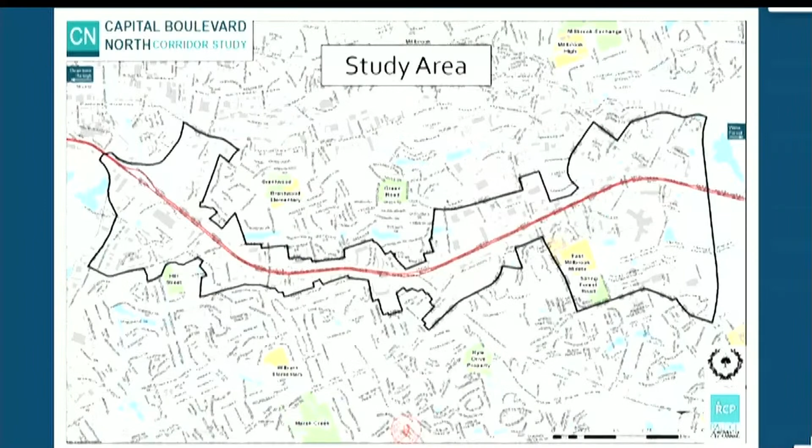Next slide, please. So the first part of the study is the street improvements, focusing mainly on Capital Boulevard, and that has two parts that are integrated in order for it to function.

The first part is a proposal for a series of interchanges on Capital Boulevard. Pretty much all the major signalized intersections are proposed to be converted into grade-separated interchanges. The point is to increase capacity for vehicular traffic, but that raises the question of how you accomplish that without causing a lot of negative impacts for the existing urban development that's there.

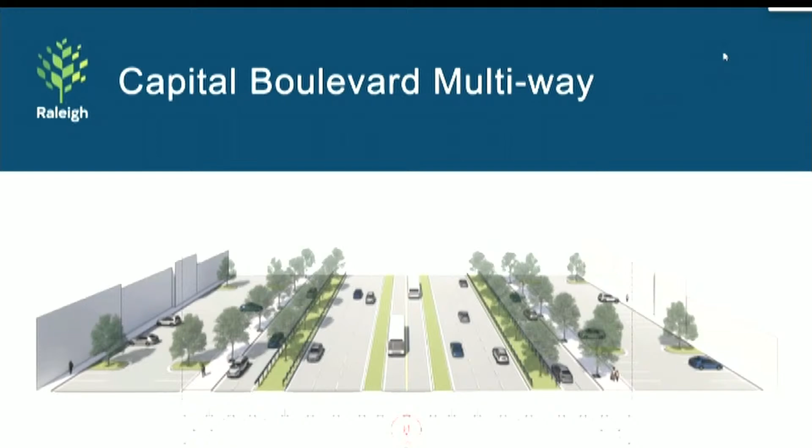The other thing I'll note is that on some streets, the current proposal for Capital Boulevard North is that there not be a full movement interchange, meaning you would not be able to make all the turning movements. In some places, we're recommending that it only be right in, right out, so you could only make right turns onto the side street from the local lane, or from the side street onto the local lane, and there wouldn't be a way for vehicles to cross Capital Boulevard at some of those smaller cross streets. In those locations, we're proposing a pedestrian bridge, and I'll talk about that in a moment.

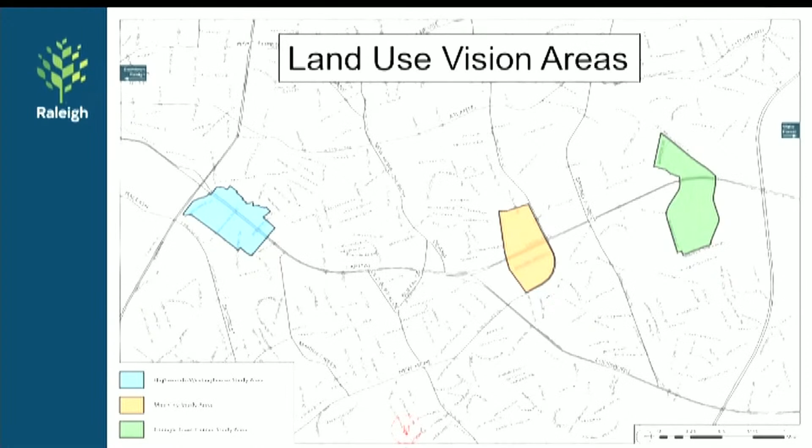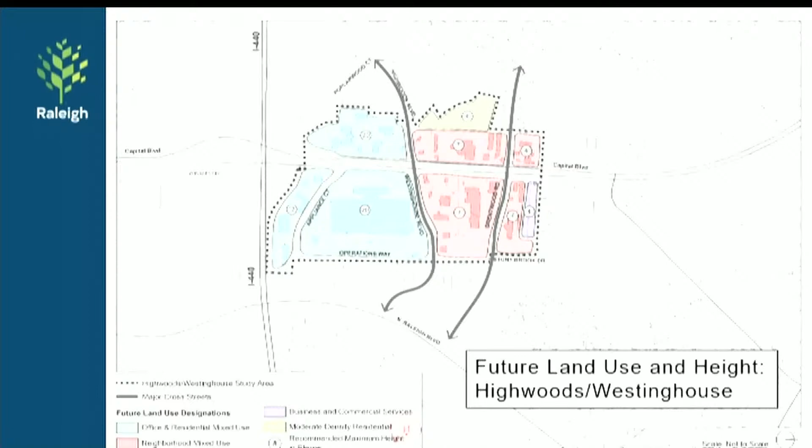The next slide shows what that can look like in the Highwoods area—recommended types of uses, whether residential, office, commercial, or a combination, and what heights would be appropriate. The next slide shows that we can integrate that with urban form policy recommendations, which say there should be secondary streets that create a more walkable urban area with integrated land uses that are not fronting directly on Capital Boulevard.

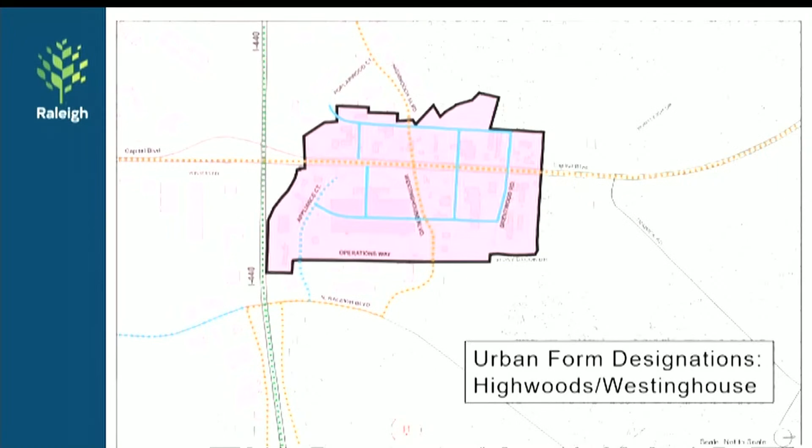Capital Boulevard is not the most pleasant place to walk today, so we think there can be new streets that provide a great walking environment that doesn't rely on Capital Boulevard. That's what the urban form policy can encourage. The next slide shows that if these policy maps are implemented through private redevelopment, we could see a recreation of those areas to look more like this.

So that's basically the initial phases of the Capital Boulevard North Corridor study—coming up with street improvement recommendations, then adding the layer of land use recommendations. This third layer we're going to talk about this evening is how those things get linked together for a full multimodal experience.

If you noticed on the multi-way boulevard section at the beginning, what was in the middle of Capital Boulevard was dedicated lanes for bus rapid transit. That's the first multimodal element—Capital Boulevard itself is proposed to have bus rapid transit, with a BRT station at each one of the proposed interchanges. That creates a great way to travel along Capital Boulevard without a private vehicle. Then there's a question of how we can supplement that with bicycle and pedestrian facilities, and the next slide will start talking about that.

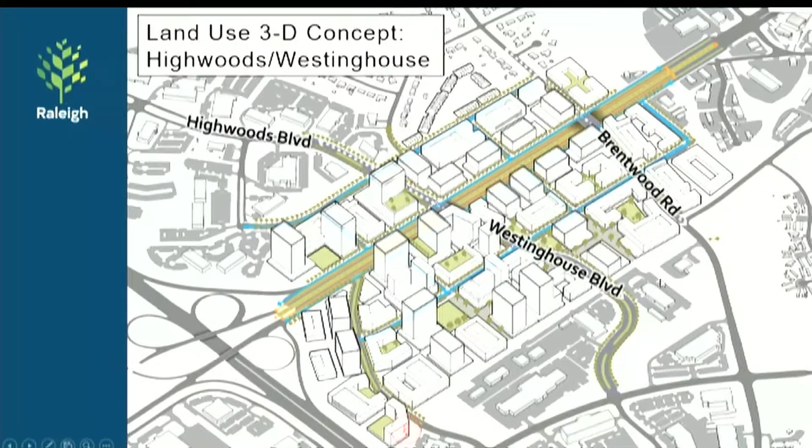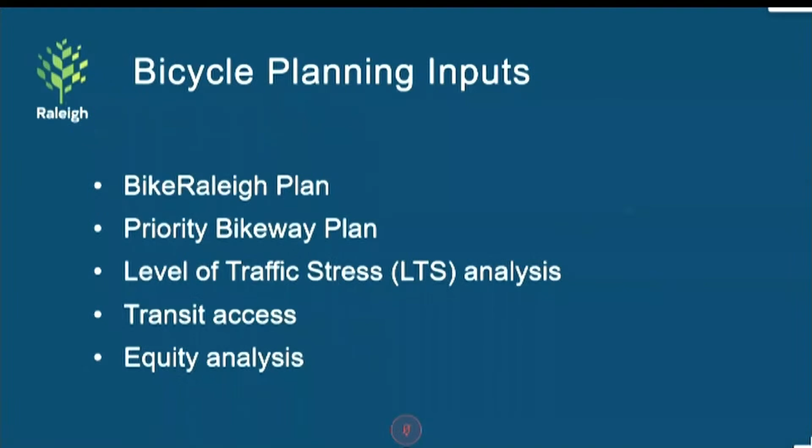When we started thinking about planning for bicycle and pedestrian improvements, we looked at the existing bike plan, and then the priority bikeway plan that emerges from that. We had our consultant Toole Design perform analysis, as well as our lead consultant WSP, on level of traffic stress, transit access, and equity based on demographic data from the corridor area. The next couple slides just show those maps, which are also included in the map set with the agenda, so you can look at those in more detail. I won't spend a ton of time, but these are the inputs that went into this planning.

Regarding traffic stress, Capital Boulevard itself is not the most pleasant in its current form. But there are a number of neighborhood streets on either side that are more comfortable for walking and cycling, and some of the cross streets have differing levels of comfort as well.

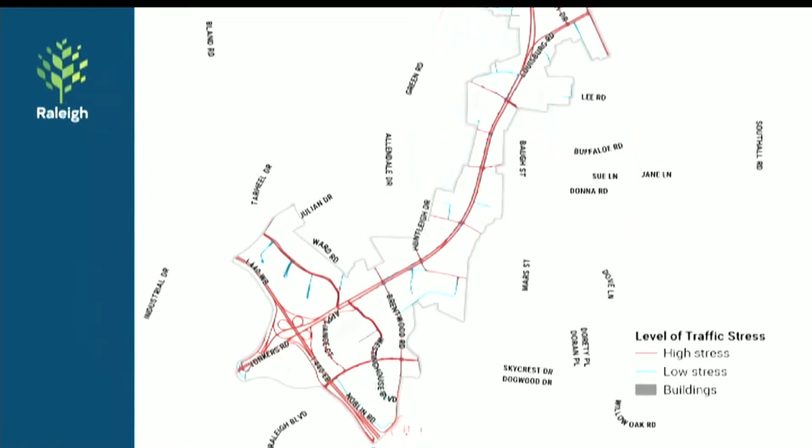For access to transit, Capital Boulevard currently has the Route 1 bus service, which is the highest ridership transit route currently in Raleigh. There are a number of crosstown connectors that also access Route 1 and provide transit service to the east and west, and also north towards the Wake Technical Community College North Wake campus. It's a well-served area for transit currently, and that would only improve with bus rapid transit. So we want to make sure any bicycle and pedestrian improvements link those things together.

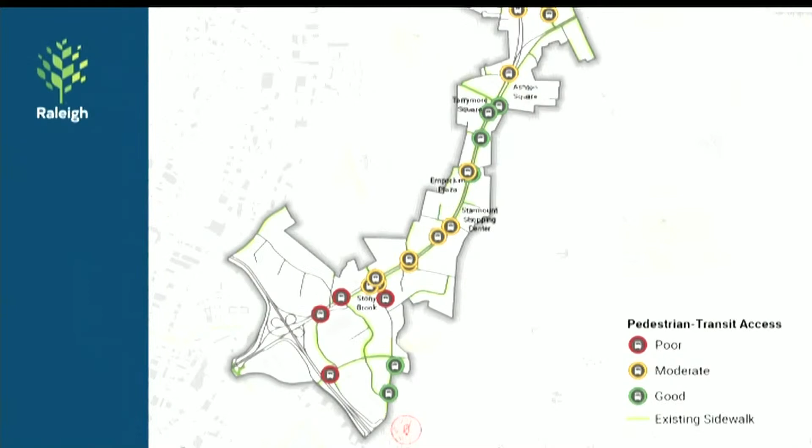When we put those things together, we did an initial technical analysis to give us a basic framework of where we think are the most desired places for better bicycle and pedestrian facilities. This map is our first take based on the criteria we put together.

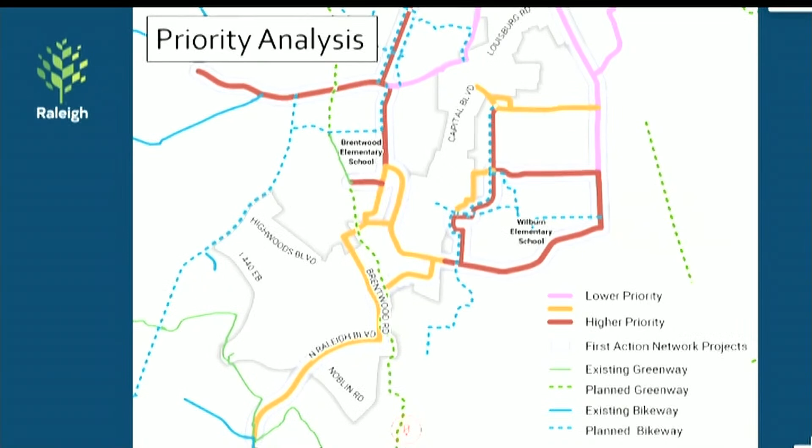From there, we took a deeper dive, looked at what's on the ground, and considered how these improvements would actually get implemented. The next slide talks about how we envision implementation, and as we walk through those steps we'll see the layers of each one, and at the end we can look at how it all comes together.

There are three ways we see bicycle and pedestrian improvements being implemented on or around Capital Boulevard. The first is city street improvement projects—streetscaping and street construction projects that happen regularly, with a number currently in planning or construction around Capital Boulevard. That's a way we can implement some of these recommendations in the near term.

As I mentioned at the beginning, this corridor study proposes to rebuild Capital Boulevard itself and a number of its intersections with grade-separated interchanges. Those are opportunities to incorporate new bicycle and pedestrian infrastructure, which is especially important because of the BRT connection.

Finally, private redevelopment can lead to the construction of new public streets. A lot of that comes from the street plan map, as well as the Unified Development Ordinance standards and the street design manual. That's a third way we can look at accomplishing this.

The next slide talks about the timeframes we see for these approaches. As I said, there are a few projects already in planning or under construction that will bring new bicycle lanes and sidewalks in the near term. If we can use this study to encourage funding for other street improvement projects, those can supplement it. The Capital Boulevard corridor itself and the interchanges, if we're able to secure funding through the North Carolina Department of Transportation, could start construction about 10 years from now. Depending on how those projects break into different segments, it would take a number of years even after the first project is funded and goes into construction.

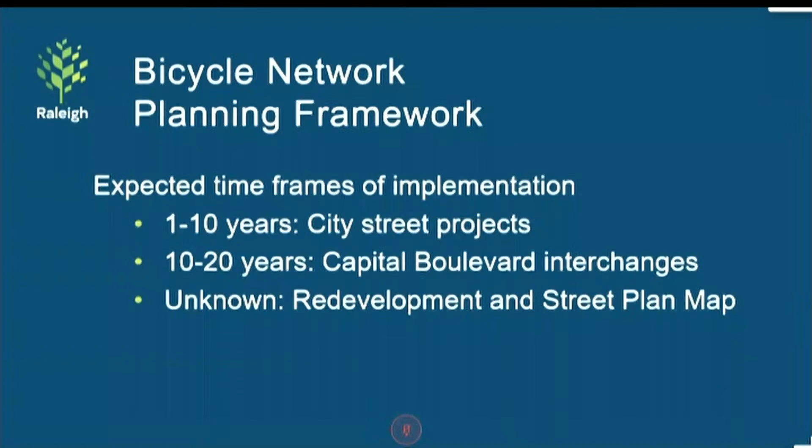So the first stage, as I mentioned, is looking at the normal streetscaping projects that the city does. Here's a list of those projects that are already either in design phases, programmed into existing budgets, or under construction. This is actually a pretty good amount of projects in this area. It's encouraging to know these will be in place in the next few years, providing at least 6-foot sidewalks on either side for all these streets, and for many of them a bicycle lane. That's a big help to the connections in this area.

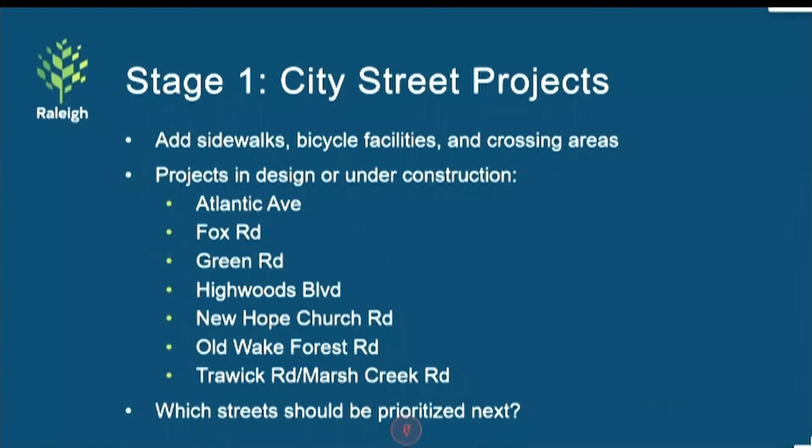So then we have to ask: knowing these are going into place, how do we create a true network that links these together and allows someone to really get around the corridor on a bicycle? The next slide will show how we prioritized different street projects when we looked at that question.

The map set in your agenda is basically the final version of this thinking. This was an earlier map we used to think through it. You can see we thought through this hierarchy of prioritization based on those existing projects.

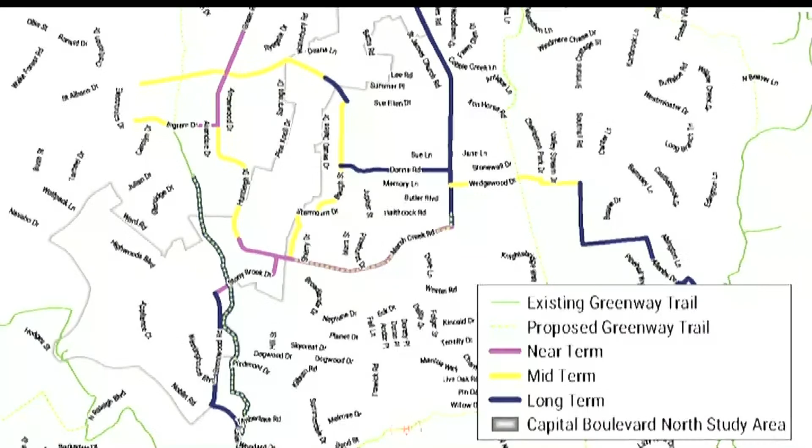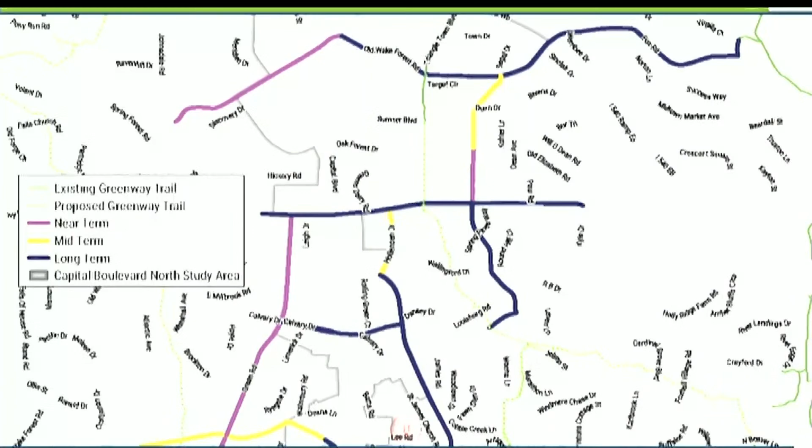The next slide shows the north end. These maps can be a little busy, and it can be difficult to see the vision, so the following slide has a map that I think is helpful. It's been helpful for me to think about this area because it's a bit more simplified.

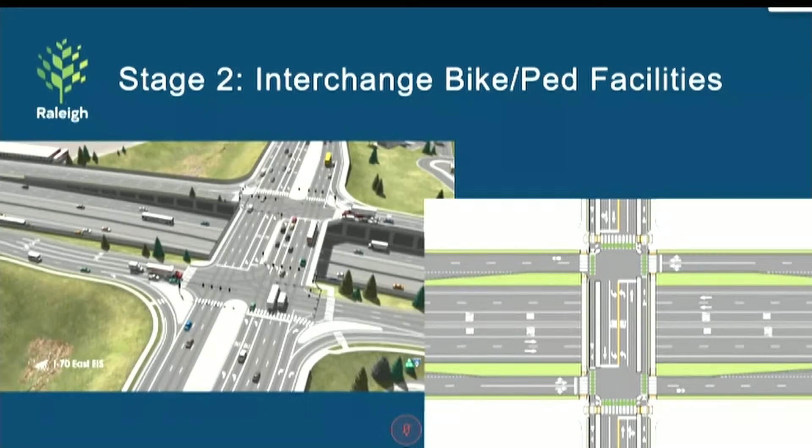The next slide covers stage 2, the actual rebuilding of Capital Boulevard and construction of interchanges. The city already has a policy on the books that when we have a grade-separated interchange, there should be a protected bicycle facility through that interchange, if a bicycle facility passes through it. We asked Toole, our consultants, to come up with drawings showing what that will look like.

You can see those are pretty regular — about every third of a mile there's a proposed interchange. That gives a lot of ability to cross Capital Boulevard without having to go too far north or south before reaching a safe crossing. The next slide shows some images of what those crossings will look like.

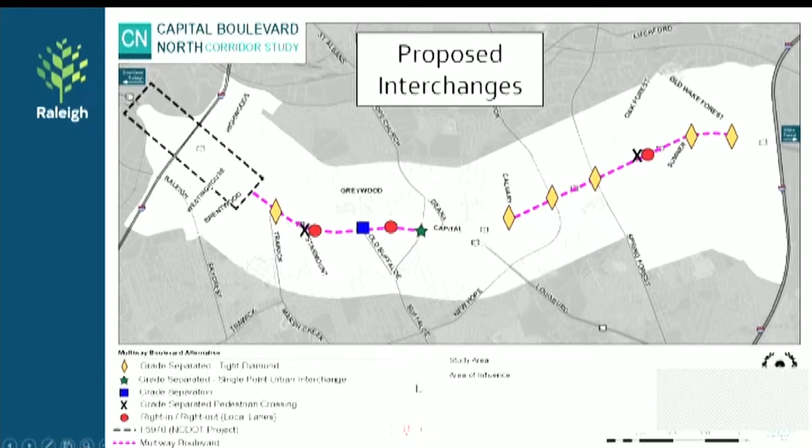These drawings are going to be included in the final study report that we bring to the City Council. The benefit of these is that, if and when NCDOT funds these projects and puts them into construction, this guidance tells them the types of facilities we would like included with these interchange projects.

You can see we have a couple different varieties depending on the size of the cross street. In some cases it may be reasonable to combine sidewalks and bicycle lanes into one multi-use path on one side for a smaller cross street. For a larger cross street, it may be better to have sidewalks and a protected bicycle lane.

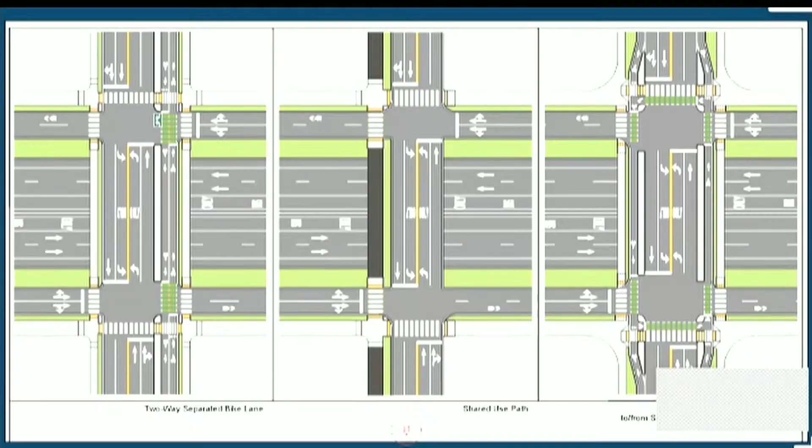I'm sure you're all familiar with what a protected bicycle lane looks like, but here are some example images.

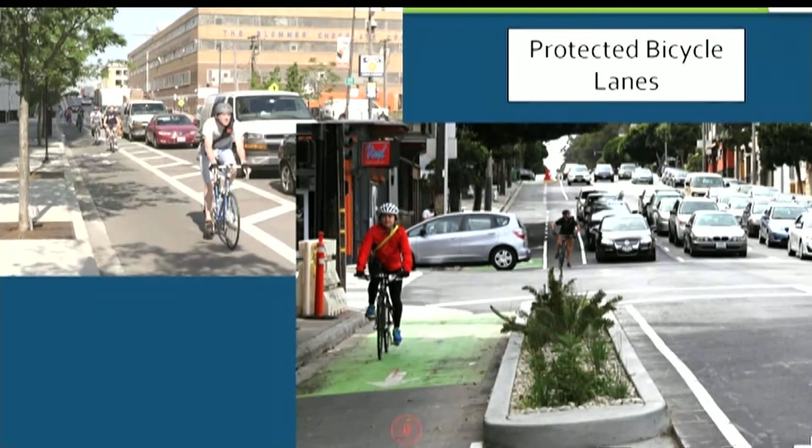And then the pedestrian crossing. We don't have design recommendations for pedestrian bridges, but these are the general type of bridges we would see, and of course they would have to be ADA accessible. If they are integrated with a bus rapid transit station, there would probably be more significant pedestrian access built in as part of the station design. I do want to say that the Capital Boulevard North Corridor study is not a BRT planning study, so we are not doing station design.

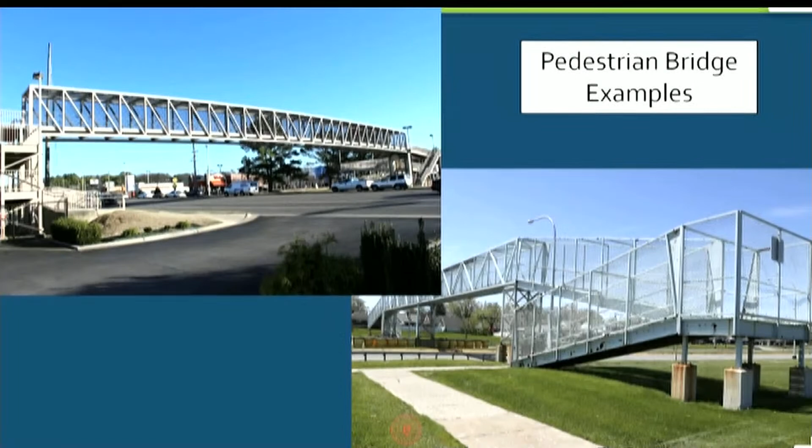We're not doing BRT route planning. We're simply saying that BRT makes sense for this corridor and that these interchanges make natural places for there to be stops.

The third stage we see for implementation of these improvements is that when private property redevelops, there can be a requirement that the developer construct a public street through their property. One way that can be required is through the street plan map. By adding streets to the street plan map and designating the type of street, we can encourage better bicycle facilities in certain locations.

In addition to the general street cross sections in the street design manual required by the street plan map, we are also working with the Urban Design Center to come up with custom street sections for some of these streets, particularly in the land use vision areas I mentioned earlier, to make them especially friendly to pedestrian and bicycle travel.

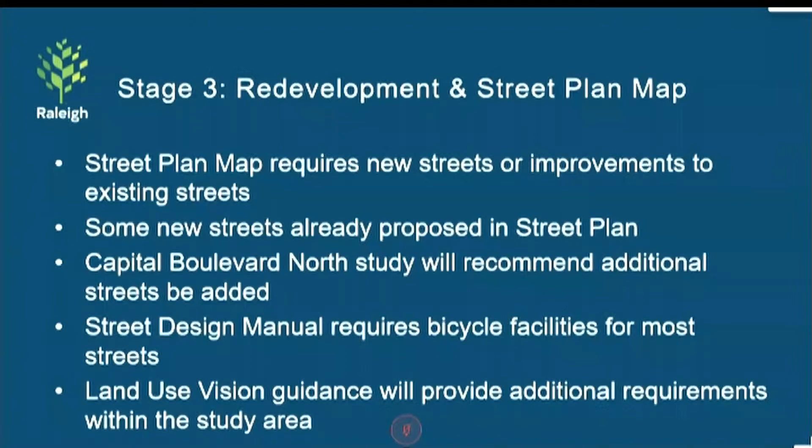Again, the time frame for that is unknown because it relies on private development. There are a couple of extra policies we are including in our recommendations that have to do with particular areas around the study area with somewhat unique contexts.

The Marsh Creek Greenway is proposed to come through this area. Marsh Creek passes underneath Capital Boulevard, north of Trawick Road, and currently there is not a way for that Greenway trail to be built with the current culvert. So one of our recommendations is that any street improvements from this study should include construction of a way for a Greenway trail to pass underneath Capital Boulevard.

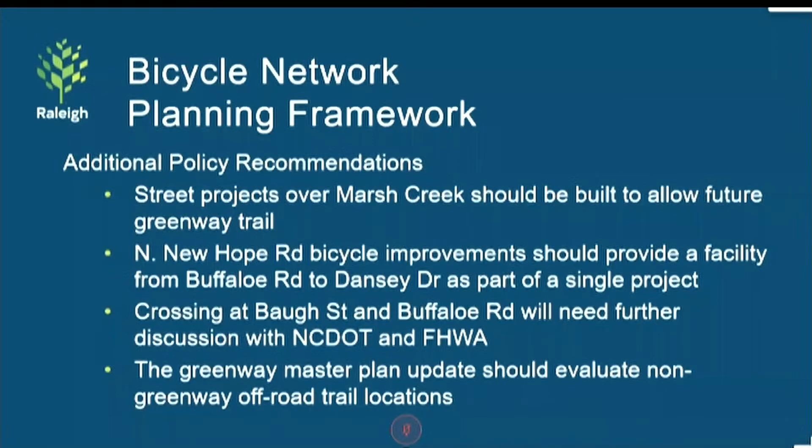For those users, there is a desire to make it as comfortable and as welcoming as possible, to encourage people who maybe have felt unsafe previously to start using the local non-motorized transportation network. So this idea is thinking through how we can invite people to get out and about on foot and on bicycles. The next slide will get into that question.

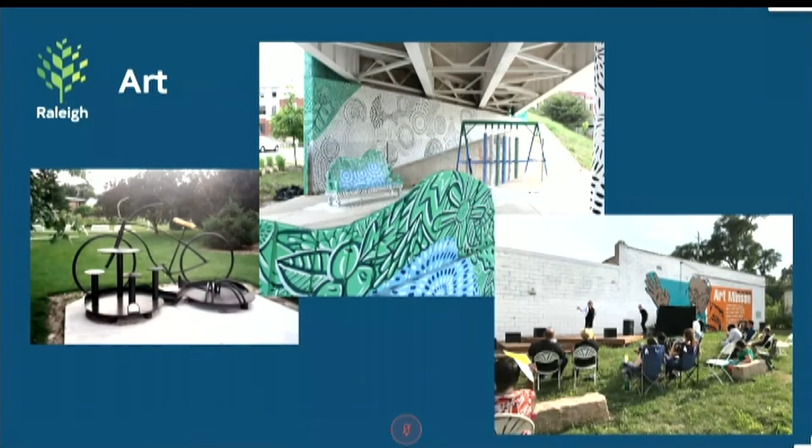Again, it can just be that someone wants to take a break, and that could be integrated with a transit stop or an existing park facility. We really would like it to potentially be a waypoint for people to get to other places.

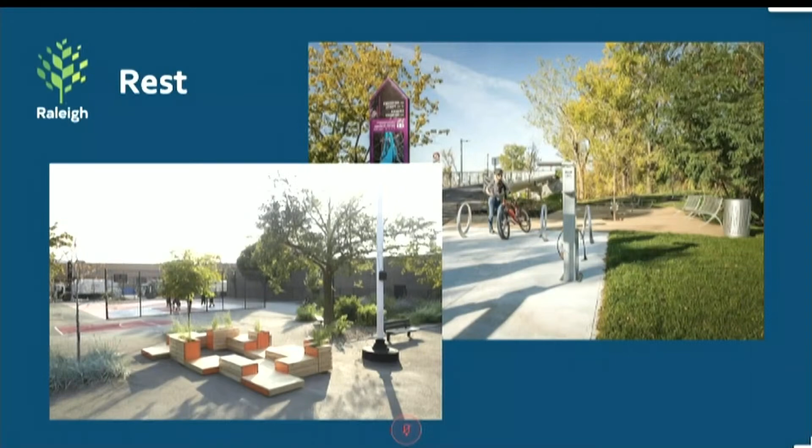The next slide, please. That's where you could build in even wayfinding, saying if you keep going on this path where you've just stopped at this pocket park, you will get to a full city park with a community center, or you will get to a shopping center or a transit stop. Next slide.

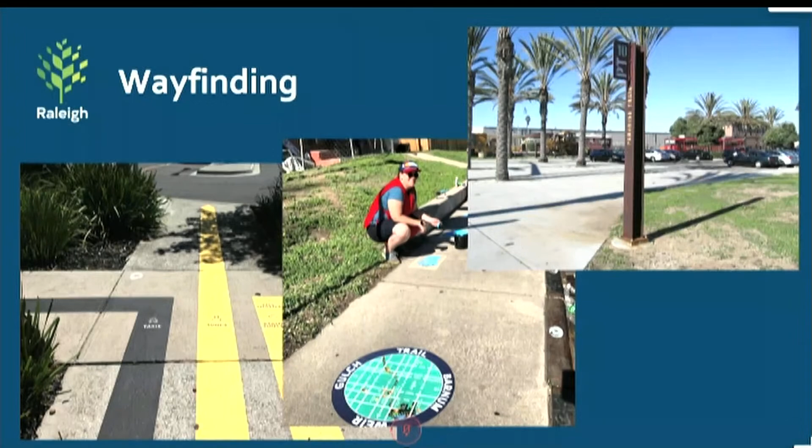One of the things we've heard from the community is concerns about portions of the study area that don't feel safe, particularly in transition areas between shopping centers and neighborhoods, where there tends to be portions of the street that are not very active, that don't have storefronts or homes facing them. So could these amenity areas also be places where we add lighting and elements that make people feel safer moving around, particularly at nighttime?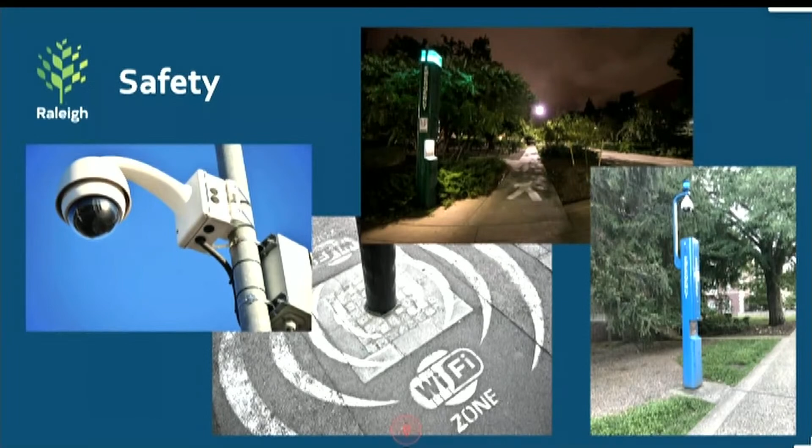When we look at this, we notice there are a lot of places, like transition areas between neighborhoods and shopping centers around the corridor, that aren't being used for much currently. They could be used. Some are private property, some are public right-of-way, but aren't being used for a whole lot. The next few slides will show some examples.

There are dead-end streets along the corridor where in the future there's likely to be a public street connection, but currently can be used for things like illegal parking and dumping, which is not good for the community.

There are stream corridors that are currently just used as utility easements, but could potentially have more value to the community.

Unused areas at the edges of shopping centers, or excess pieces of right-of-way—could those potentially be used?

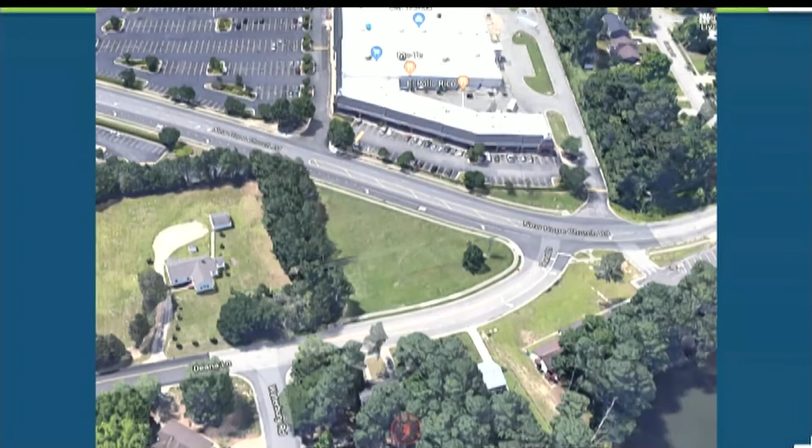This is actually a transit stop next to the Mini City shopping center near a parking lot, with a large wall behind it and an empty yard area. That really seems like an unused opportunity.

This is the edge of Spring Forest Park, which will be connected to the improvements on Fox Road. So this will actually be connected to a sidewalk very soon.

The thought is, for folks who are not the most advanced cyclists or who haven't historically felt comfortable walking around this area, is there a way we can make it more welcoming to do so?

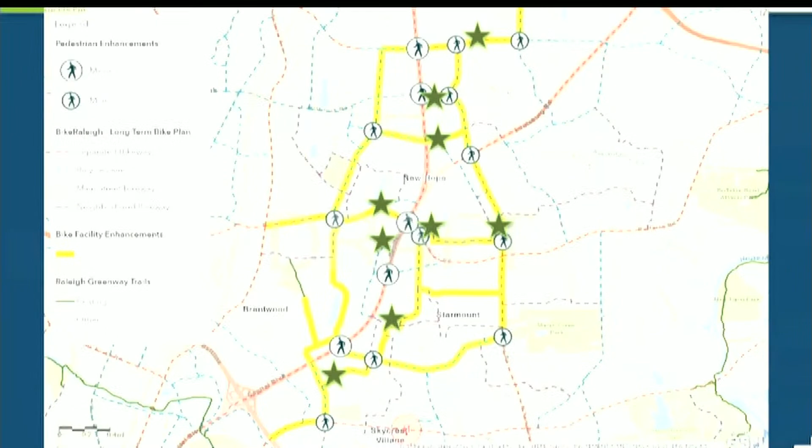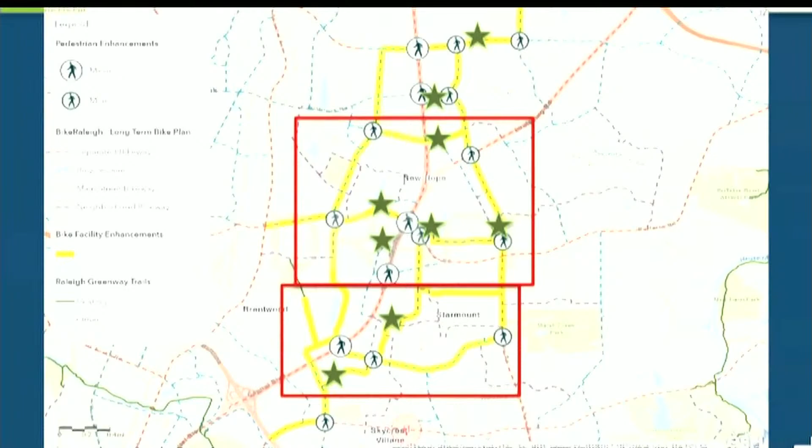This could be an iterative thing, where there are portions of it that are built and have value and benefit by themselves, and then it can be stacked on top of each other. There could be portions built at different times that stand alone, but when they come together, it really makes a cool amenity network.

This is taking that site at Mini City and saying, what if there was bicycle parking at that transit stop and a wayfinding sign with a map? What if that wall behind there was painted with a mural? And what if there was a small play area, so if someone has walked their children to the bus stop, their children can have a little bit of active recreation while they wait for the bus? That's the kind of thing we're thinking through.

This is something that when we presented to the Parks, Recreation, and Cultural Resources Department before the pandemic, there was hesitation about how this gets funded and who would maintain it. With the pandemic, that question is even more relevant, and it was relevant before. So that amenity network idea is really more conceptual and could be the subject of future study.

The next steps are that we would like to organize a public outreach process to let the community look at these ideas and give us feedback in the next few months, and then make any revisions based on what we hear from them and from you and other stakeholder groups in the community. We hope to have the final study report together by the end of the calendar year. I'd be happy to answer any questions you might have.

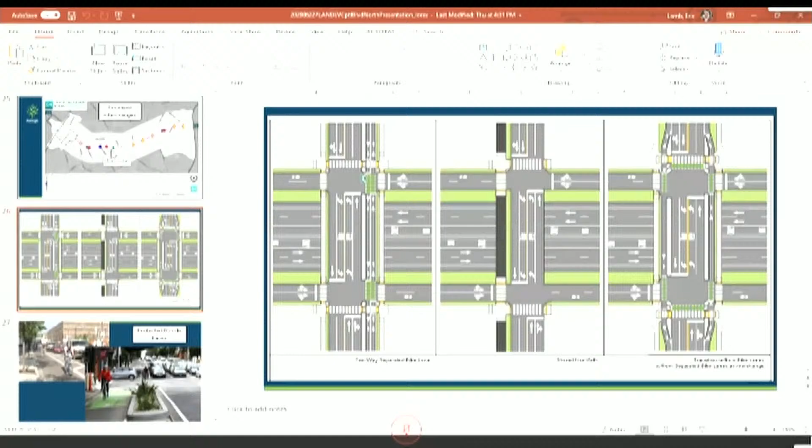Specific recommendation: I noticed this plan, especially the grade separated interchanges, involves slip lanes. Slip lanes are not easy to traverse for any mode other than a motorist, so I'd like to see consideration of removing those where possible.

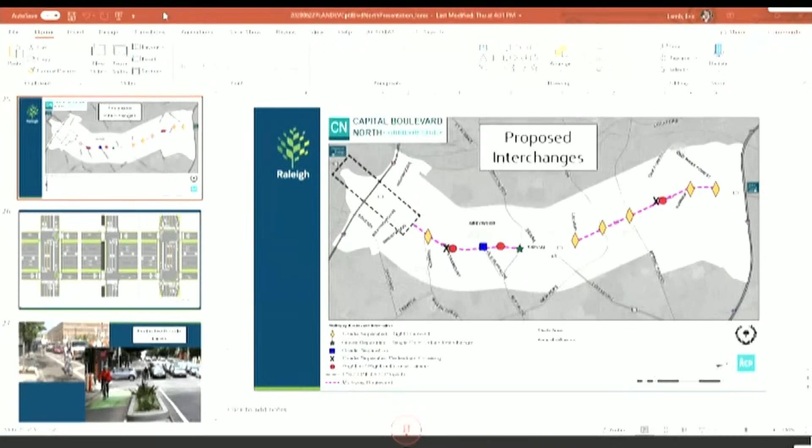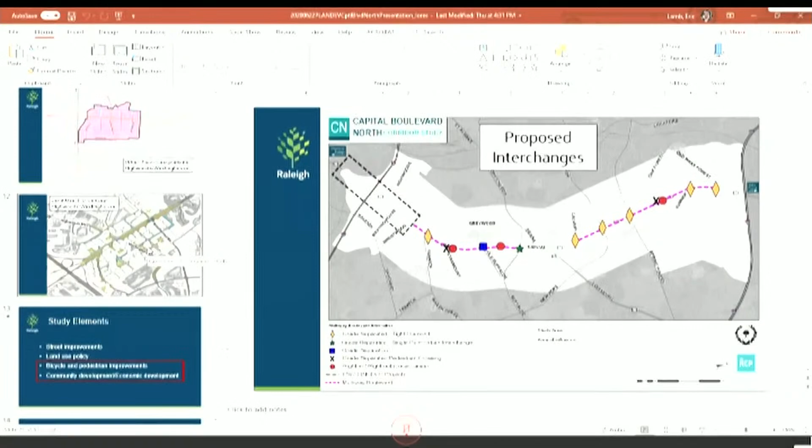I would also love to see additional thought given to how we can make these streets outside of Capital Boulevard within the study area truly more multimodal—not just adding a 6-foot sidewalk or a buffered bike lane, but calming the street, making them slower. I think that would make the third places more successful and help send the signal to redevelopment that it also needs to be urban in flavor. Otherwise, you end up with Six Forks Road on North Hills East, which is the backside, and that's not a pleasant place to be.

My final comment: knowing this is a billion-dollar project that will take decades to implement, we need to consider the needs and safety of existing users. I'd love to see if you're putting together any kind of phased implementation plan for how we can continue to improve these roads, including Capital Boulevard, in the meantime. I know of at least one death at an intersection here within the past 6 months. There are a lot of non-motorists in this area—like you said, lots of young people, lots of older people, and a lot of poverty in the area, and they need to be considered too.

Thanks. Okay, so Miss Alley, if I can address a couple of those items: number one, we've talked about this, and we're not going to have slip lanes in the final design. You've seen some visualizations shown for development purposes, but we agree that's not going to be part of the final design. This is more about getting our heads around the big picture concept that we're going to move towards structural solutions.

As it relates to pedestrian safety in the corridor, creating bridges and locations where people can cross the street safely, and minimizing harm and minimizing the footprint of those intersections compared to what's out there right now, is really a big goal for us.

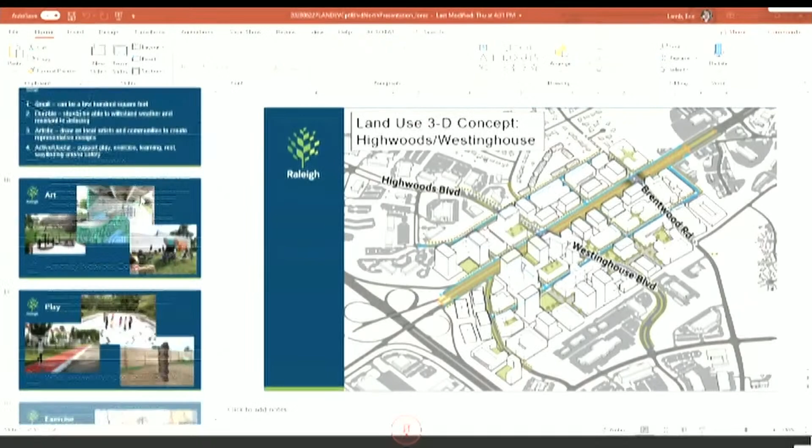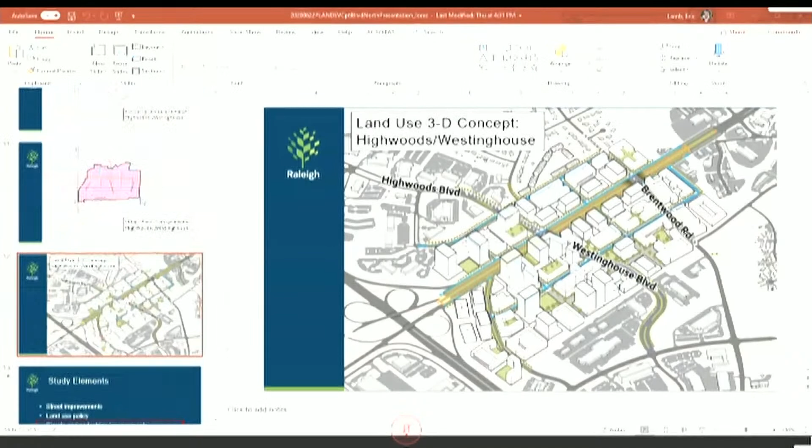I would also like to respond to trying to work on traffic calming in the land use vision areas. We've been working with the Urban Design Center to come up with some custom street sections that we would like to apply there. Like the example I showed from Highwoods and Westinghouse, the urban form map showing that new parallel street network, or that new local street network, would be reinforced by the street plan, so we can make recommendations in the study saying that when you see that street designation in the street plan, it must be built with this custom section shown in the corridor study. That's something I wasn't able to put into this presentation, but it will be part of the public engagement process, with more detail about what those streets should look like in those locations.

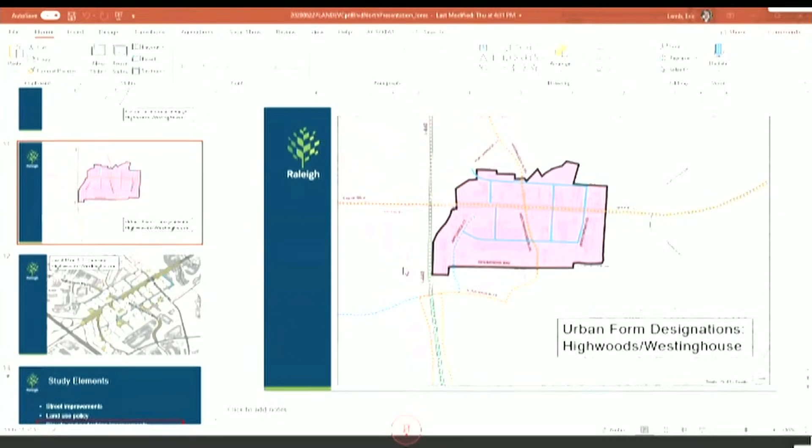I think that's great, and it looks like redevelopment will make clusters of urban-ish development with slower roads. I would just recommend that you expand that notion of a custom street, and thinking of a people street, to the existing streets outside of new development and outside of Capitol Boulevard—thinking about New Hope, Green, Buffalo. The city, as Eric rightfully said, has made a lot of effort out there and invested a lot, and while I think it is less fatal, it is not a pleasant place to be. People are using it because they have to, and we need to respect them and give them places that are dignified, safe, and pleasant.

Agree. Eric, do we need to take any action on this tonight, or is this just for information?

Yeah, I echo all your concerns, Elizabeth. When you see some of the renderings, seeing basically a highway being proposed is jolting, when Capitol Boulevard is already such a dangerous corridor. I think there are a lot of improvements on some of the intersections, independent of the floodplain discussion, when we're looking at more protected facilities there. But then there are destinations all along the corridor—how is that being handled? It's already an issue, and it seems like there's an opportunity to make that even worse if we're condensing into potentially fewer crossing areas in some instances, if we're looking to create more of a freeway type of facility.

But really appreciate the presentation. Does anybody else have any comments? Eric, did we have any public comment come through?

I did. Mary Jo Gellenbeck posted and said, as a multimodal user, the designs all make my heart race from imagining traversing the interchanges as a vulnerable road user.

All right, and I did see Dwight raise his hand as well. That's right, am I on? Yes. Great, I had a question if you would clear up for me. I don't quite understand what the recommendation is for integration with the greenway trails. One of the bullet points talked about non-greenway off-road paths related to the greenway. Could you explain that a little bit further, please?

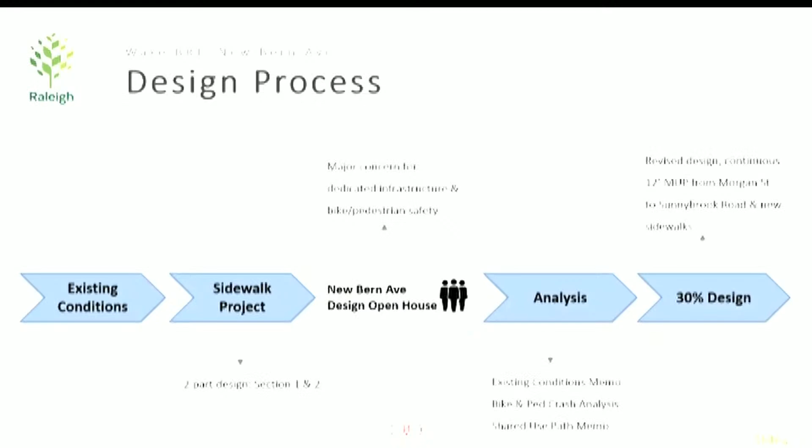That analysis altogether has gone into a recommendation that we presented to the City Council in March of this year, which was to combine the New Bern Avenue Sidewalk Pedestrian Improvements Project with the New Bern BRT project. And we have, at 30% design for this project, a revised design from a bicycle pedestrian perspective that incorporates the sidewalk project and provides a continuous 12-foot multi-use path from downtown, from about Blount Street all the way to Wake Med, Sunnybrook Road.

This design did incorporate NACTO standards. The recommended minimum for shared use paths is 10 feet. The 30% designs that we're showing now have a 12-foot multi-use path. The NACTO designs for the New Bern Avenue conditions line up with the shared use path concept and provide continuous infrastructure along the entirety of the corridor. Certain enhanced on-street improvements will also be made at crossings to help the bicycle pedestrian infrastructure along the entire corridor.

Looking at the level of service on shared use path volumes in the NACTO standards, we would need about 200 users within a peak hour along New Bern Avenue to have a level of service B, and actually an additional 100 for that level of service to drop at all at that 12-foot multi-use path level. Level of service B stands for good, where you have pretty good bicycling conditions and retain significant room to absorb more users while maintaining high-quality user experience for both bicyclists and pedestrians.

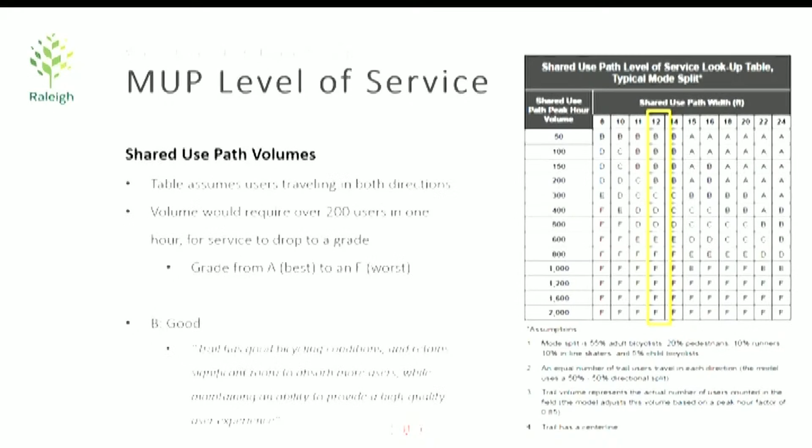You've seen this slide before, but just a refresher, this is what the current corridor looks like. We have 3 distinct segments from downtown at Go Raleigh Station to approximately Tarboro Street intersection. BRT will be operating along the right side of the road. You can see a graphic below that shows bus on the right with parking and then sidewalks. And then from Tarboro Street intersection all the way to Sunnybrook, where Wake Med is located, we propose to have BRT in the median running transitway. Again, you can see the graphic at the bottom.

So this is a fully dedicated BRT facility, completely separated from traffic. And finally, from Sunnybrook all the way to New Hope, the area with Walmart and some of the other stores, BRT will be operating in mixed traffic. However, BRT infrastructure will include stations with level boarding, and also it will be supported by transit signal priority to make sure that buses can get through intersections and stay on schedule. Next, please.

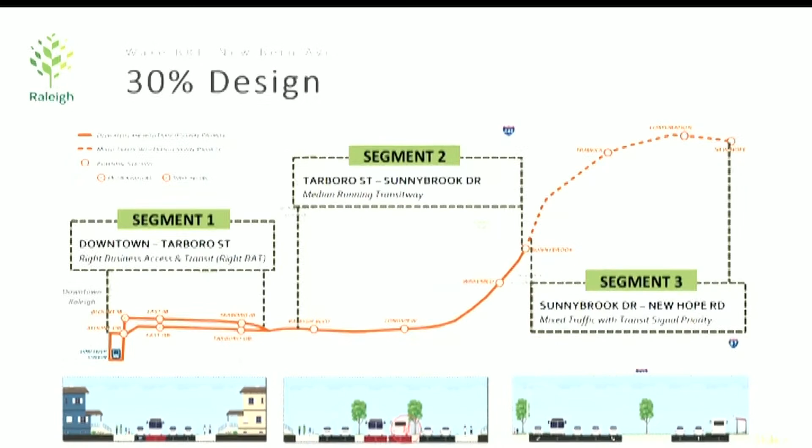You can see a bus operating on the right with general purpose lanes adjacent to the BRT lane, and then you see the parking lane. One thing I forgot to note is where we have this BRT on the right side, it's called Business Access and Transit, or BAT lanes. We are using right BAT lanes. What it means is, unlike a fully dedicated transitway facility, in this case cars are allowed to enter this facility for a short period of time to either pull into a driveway or access a garage, etc. So while they're not supposed to be driving in the BRT lane for an extensive period of time, they are allowed to enter the facility. Next slide.

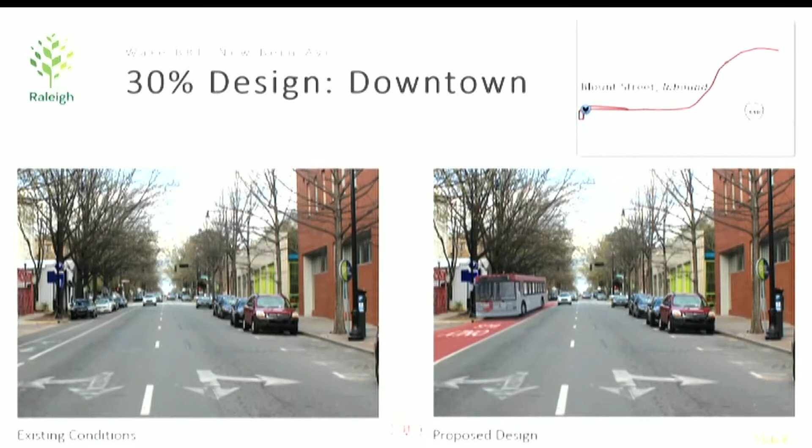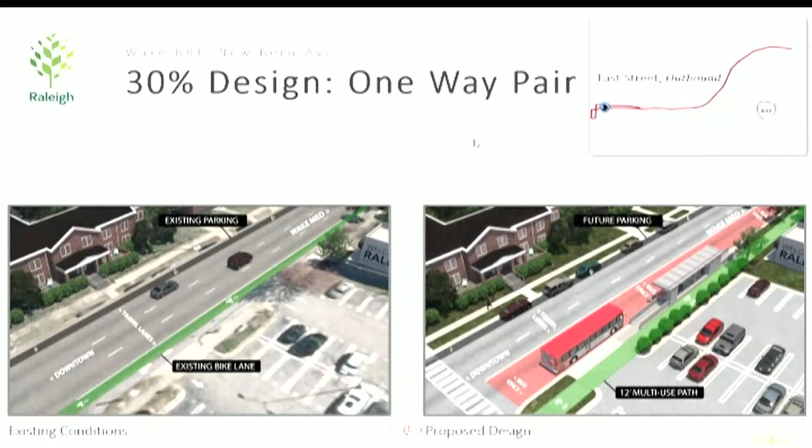Since I'm on 30% design, I'll note that our current goal is to get to about 65% design, which will provide more clarity on some of the decisions about design details by December. So this is our current timeline to get it to 65% by December.

The multi-use path continues all the way to WakeMed, and you can see the stations are also located along the median with crosswalks and pedestrian-operated signals to be able to cross safely. There is also a pedestrian refuge, and the platform ramp will taper down from the platform to make sure this is also ADA accessible.

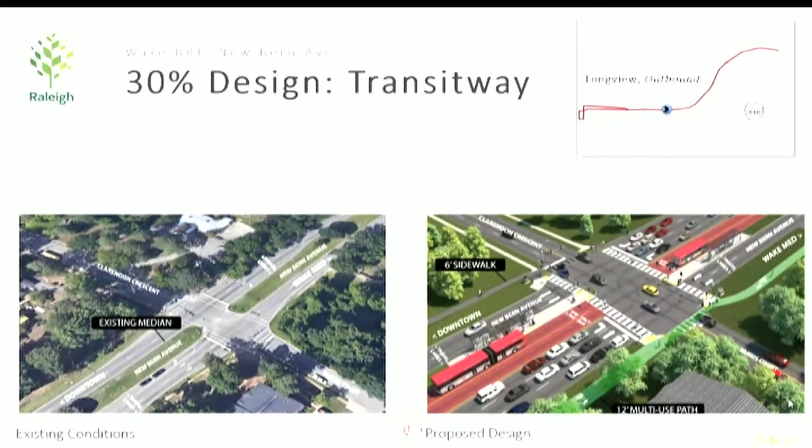So as we wrapped up the 30% design in New Bern, we also have two more corridors coming up. I mentioned that we're currently working through selecting the preferred routing, which means we also need to pick up the work left off with the downtown plan and help us fine-tune the downtown route.

So over the next 3 to 4 months, we'll be working with WSP, our consultant selected for 0 to 30% design on all 4 corridors, and we'll be fine-tuning the routing recommendation for the southern corridor connecting to Garner, the western corridor connecting to Cary, as well as taking a closer look at the recommendations from the downtown plan and refining them.

So we know where BRT infrastructure could be incorporated within downtown. As you remember, the downtown plan left several options on the table, and we're working with the BPAC ad hoc subcommittee on addressing some of the questions that still need more work.

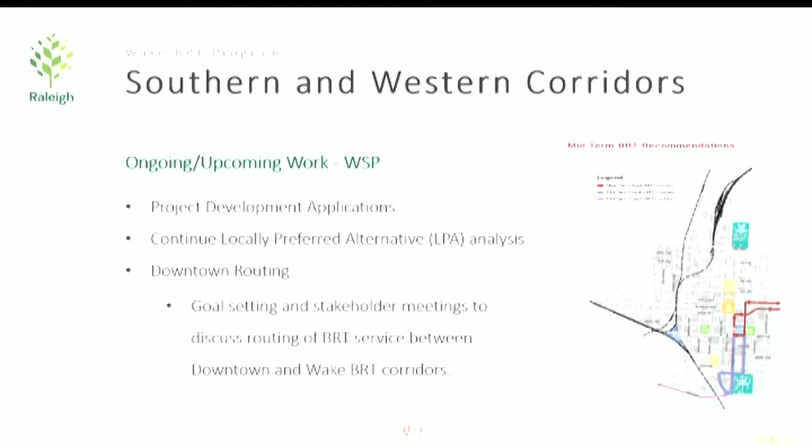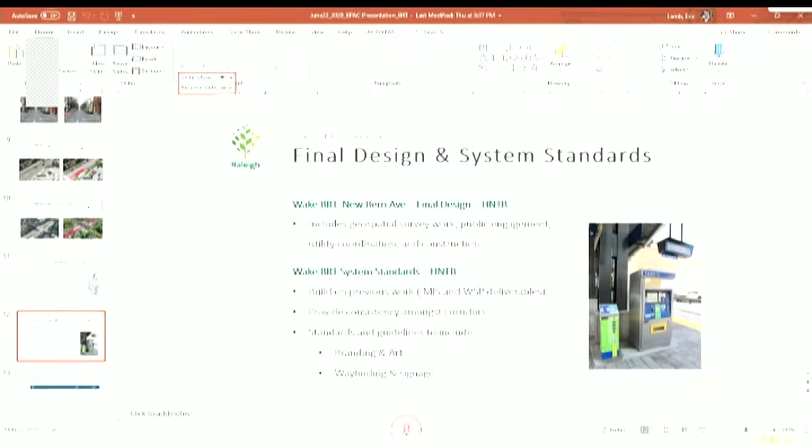So now we're adding another team to our consultants team. HNTB was selected to take New Bern to final design from 30 to 100%, as well as develop system standards. We're currently working on routing the contract so we'll have a full contract in place.

They're working on a limited scope of service right now because we wanted to make sure they can pick up the work from WSP and initiate the transfer of files. But what they will be working on is obviously taking New Bern to final design. So this is where some of the details of markings, signage, and placement of certain facilities will come in place.

They will also be working on system-wide standards, which would address wayfinding and make sure that standards set for New Bern are also the same standards set for the entire system. The reason we try to split it into final design and system-wide standards is we'd like to focus on creating a system that would be seamless to a user, no matter if they're using the system along New Bern, the Western Boulevard, or the Northern Corridor. They all know where things are placed and how to use the system.

It's not only important for the overall user experience, but it's very important from the ADA perspective, because people don't have to guess where a bench could be located or where a ticket vending machine could be located. They have a good understanding of where the bus door should be. So all these little elements that go into the placement of amenities, layout, and flow through a station should be seamless throughout the system. That's the idea behind having that element of work with a view of the entire Wake BRT program.

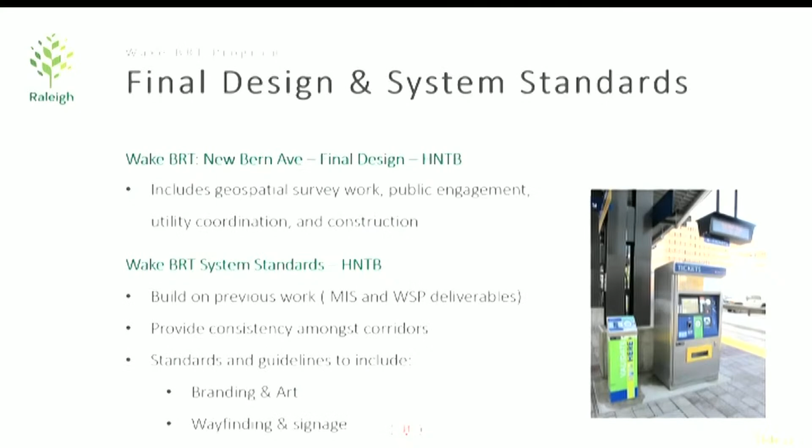So this is a summary of some of the high touch points and milestones. We took New Bern 30% design to council back in March, and then we took the contract for HNTB to council in June. We're now amending the WSP contract so they can focus on downtown routing, helping us select the locally preferred alternatives, and help us with some of the public engagement that will be consolidated with HNTB.

So just to clarify too, with WSP, we currently will be working on the limited scope because we feel we need to do a little bit more work and organize a little bit better over the next 3 to 4 months, like fine-tune the downtown routing, before we jump in and do a full scope and really dig into the preliminary design and environmental work. So we're just trying to position ourselves so that we are truly ready to start designing sometime this fall, potentially October timeline. And then, as I mentioned, our goal to have New Bern at 65% design is December, and we are aiming at Western and Southern LPA recommendation this fall.

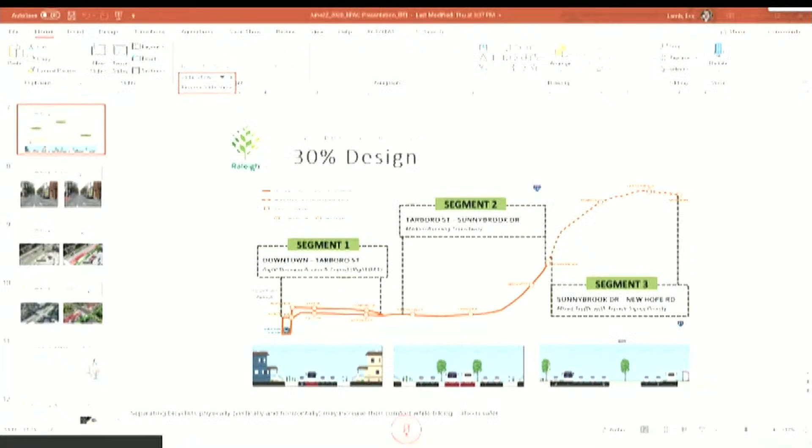Correct. Sorry to jump in, but in the stretch you're talking about, Elizabeth, I guess for pedestrian you would have an option on the north side, like you said, so the pedestrian traffic could be split in that area. One of the reasons why the BRT design from a sidewalk pedestrian perspective wasn't doing a whole lot in that section is we're not touching the curb along the north side of New Bern for that stretch.

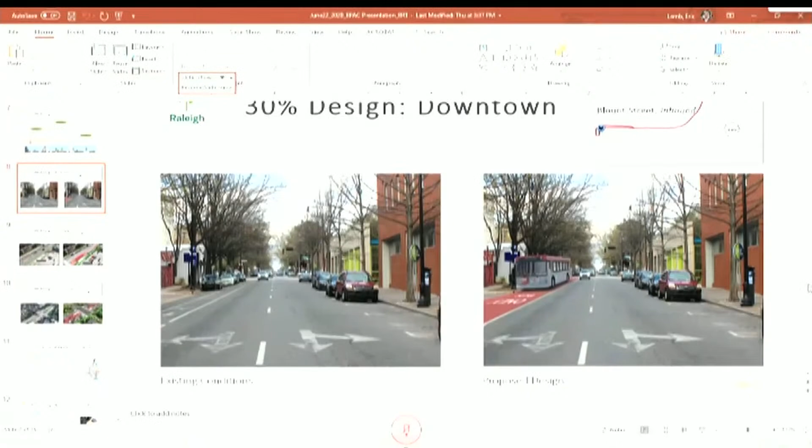I thought there was no curb. Well, what I'm trying to say is the BRT construction work is staying away from that northern section. So as part of the bicycle pedestrian improvements, we were focusing on that southern portion and providing the 12-foot multi-use path on that side.

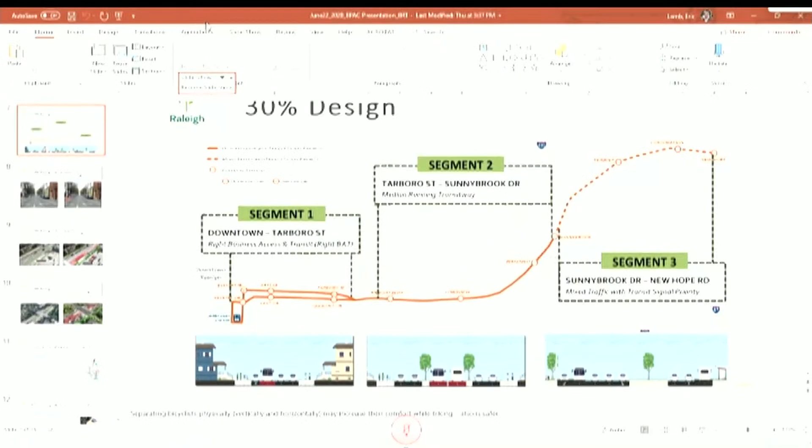Okay, well, yeah, that's a good point before we move on. To accommodate the multi-use path where we are actually putting it in, we are moving the curb into the roadway to gain more space to be able to put the path and then the planting barrier.

That's why I was asking the question, because I understand that the right-of-way acquisition is expensive and there's a lot of topography there and existing active homeowners, but we have one chance to get it right, so it doesn't hurt to ask. It'd be great to get a verge on the south side, and then on the north side, if we can increase over 6 feet, since that's new construction sidewalk with new curb and gutter, it'd be great, whether through the BRT project or through funding from the petition project. Just putting that on the record.

And then my final nitpick, understanding that we aren't in design yet, is your renderings aren't showing ramp-type driveways. But I think that's an important part of a multi-use path there. Thanks.

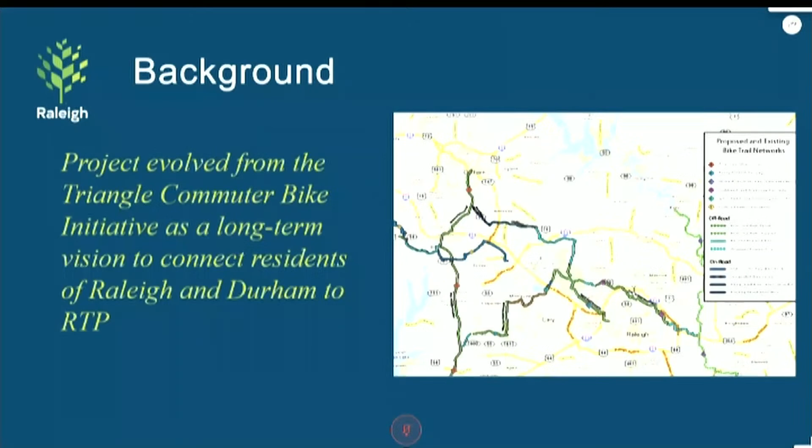I want to give you a little bit of background. The source of the project came out of the Triangle Commuter Bike Initiative, a long-term vision for bicycling connections in the greater Triangle area, specifically a network between Durham, Raleigh, and Research Triangle Park. Next slide.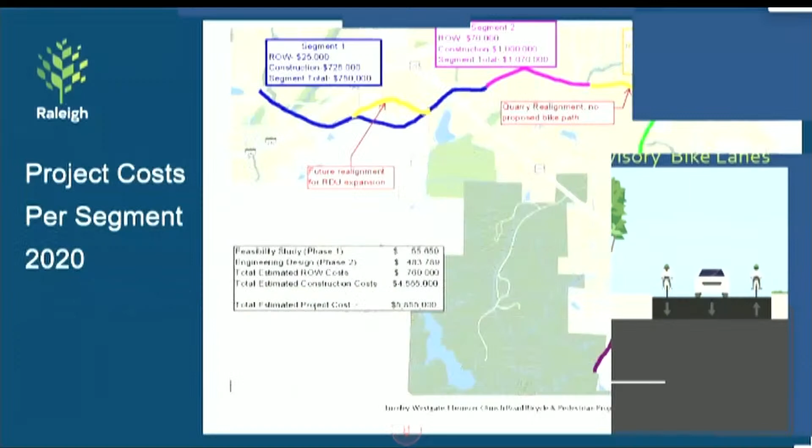Earlier this year, we got into some very detailed numbers looking at what we had in the budget and what we could afford. We had an updated opinion of probable cost completed by Stewart, and our real estate section looked at the parcel maps and gave us a fairly detailed analysis of likely real estate costs. These costs are shown on this slide by segment, color coded, and if we total the cost of all 5 sections — construction, right-of-way, and what we've spent on the feasibility study and design contract — it comes to about $5.8 million.

One thing I wanted to show on this slide is the 2 yellow sections on Lumley Road. That's a section where the airport authority is proposing a future realignment of Lumley Road. So if we built anything today on Lumley Road, it's very likely we'd have to rebuild it or have it be part of a future construction contract when that realignment happens.

There's an error on this slide — it says there's no proposed bike facility where the quarry alignment is, but there actually is, just at a lower tier than what our bike plan or project would like to have. The bike facility on the realignment around the quarry is a shared lane westbound adjacent to a sidewalk, so you could bike on the sidewalk there or use the shared lane with traffic. Eastbound on that quarry realignment section, there's a 4-foot paved shoulder. So there is some type of bike facility already on that yellow section where it says quarry realignment — it shouldn't say there's nothing there. But this project did not propose to do anything additional at that location.

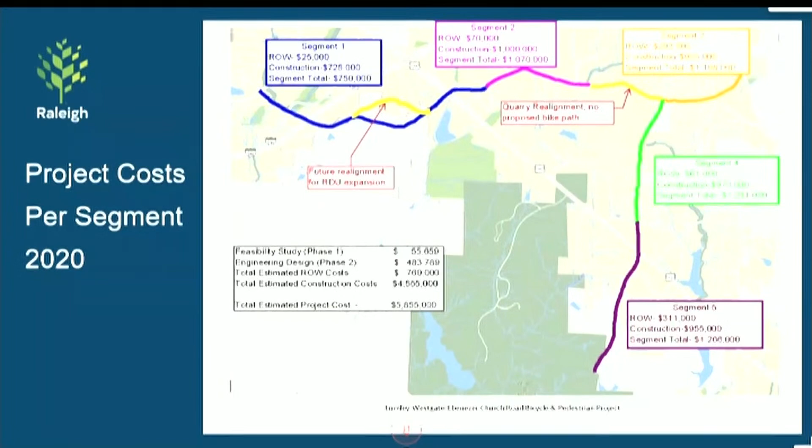As part of the public input sessions, we asked for public feedback on what the priority should be for construction of the sections. They ranked it in reverse order, with making a connection into Umstead State Park as the driving force. They wanted this built to get to the park first and then expand outward, ideally all the way to Leesville Road on the east side in section 3, and to Brier Creek on the west end in section 1. Basically, work from the primary destination people wanted, the state park, and then work outward from there.

So we have a schedule at this point. Our division manager is making a presentation to council on July 7th, the next council meeting. If we get the blessing to proceed with our recommendations, we think we can complete property acquisition this coming winter, advertise for bids this winter, award construction, and get set up for construction to begin the beginning of next year, taking a little over a year to complete.

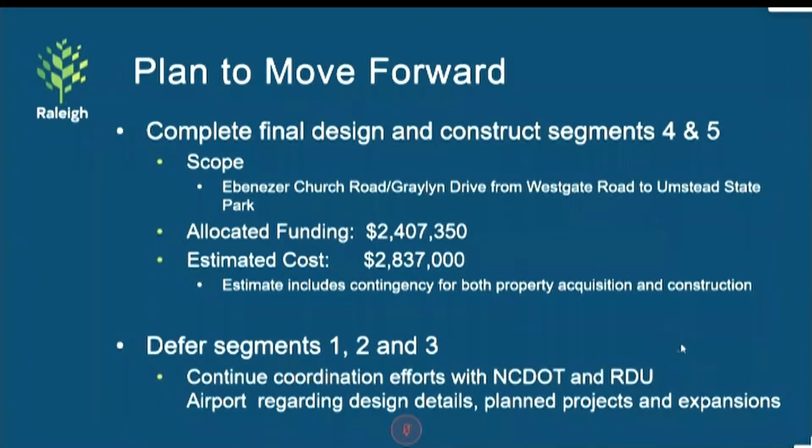I've had this project since I came to work for the city, and probably have more information on it than anyone else. I'd love to answer any questions you may have about where we are and where we're going. Eric, would it be possible to pull up the slides referencing segments 4 and 5? And I see Susan, you have a question?

I wanted to ask about the advisory bike lanes and where they're being used in that plan. I don't quite understand. There's a right angle turn on Ebenezer Church Road at a T intersection, and if you go straight through the T, it leads into Umstead Park on a side road called Graylyn Road. That's a very low volume traffic road, probably just a couple hundred cars a day, and a lot of that traffic historically has gone down to the end of the road to park for people accessing the park.

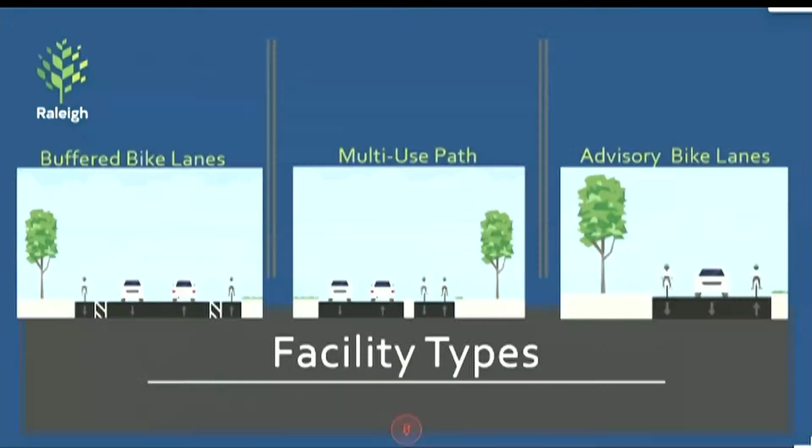There's a technique for pavement markings where bicycles are identified as using the outsides of the roadway, and traffic is given the center of the road in one lane, expected to yield to bicycles and take turns using the center lane when passing. So it's basically a one-lane, two-way traffic roadway.

Have we ever used this in Raleigh before? Not to my knowledge. No, this would be new. Places, sorry Eric, I would say that this would be new. Yeah, this would be new.

And there is one that exists in Durham. It's a contraflow bike lane in the wrong direction on a one-way street near Duke East campus, but it's a similar concept. On the map, it would be for this one portion just south of the turn where Ebenezer makes that hard angle turn. This portion is called Graylyn Drive. And this would be the portion from that intersection down to the park entrance that would be an advisory bike lane.

Well, the only reason I ask, and my concern is that if it's not something people are used to doing, will they actually do it? Or will there be no room for bicycles?

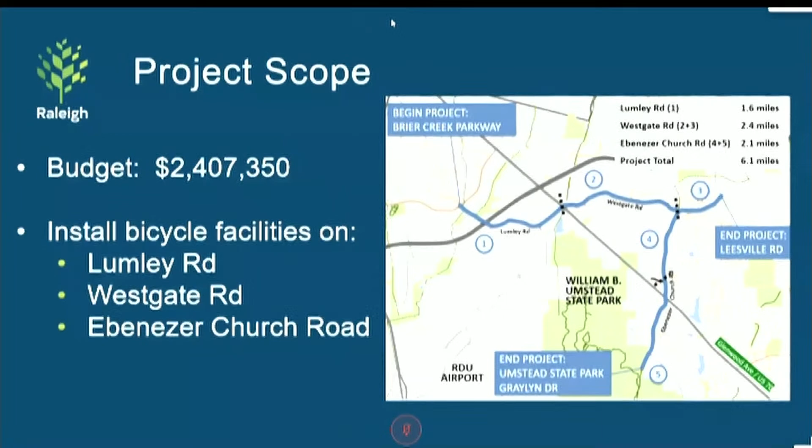So a consideration of a more tactical approach, or we could do something outside of our typical, just being more creative - if we don't have the finances to do a sidewalk, do we have the finances to reallocate a portion of the road with paint and bollards for a mixed use path, or something of that nature? Yeah, I mean, if we're not going to get a sidewalk out there for a decade, but people would like to walk, what is their alternative?

Okay, do you have a response at all to that, or just for information? Hello?

Okay, I think to Elizabeth's point, I wanted to point out that one of the side streets there goes into a neighborhood called Pat's Branch that has sidewalk in the neighborhood. And so our project would connect that sidewalk up to the road and then put in the ramps for crossing at that intersection.

That's a start, okay, it just doesn't get you along the corridor. Well, it doesn't get you out of your neighborhood. Well, the multi-use path, I mean, it's... Yeah, where the multi-use path is, it's great. I just thought I heard you refer to a place where you had to eliminate the sidewalks in lieu of just on-road bike facilities.

Is that correct? Okay, so the Pat's Branch where I'm talking about is like maybe a half a mile from the park entrance, and then the location where we identified a 1,400-foot gap that it would take to connect sidewalk up between two existing components - it's basically at the intersection of Westgate Road, so that's about 2 miles from the entrance of the park. So I'm hopeful that stays on the list for future sidewalk.

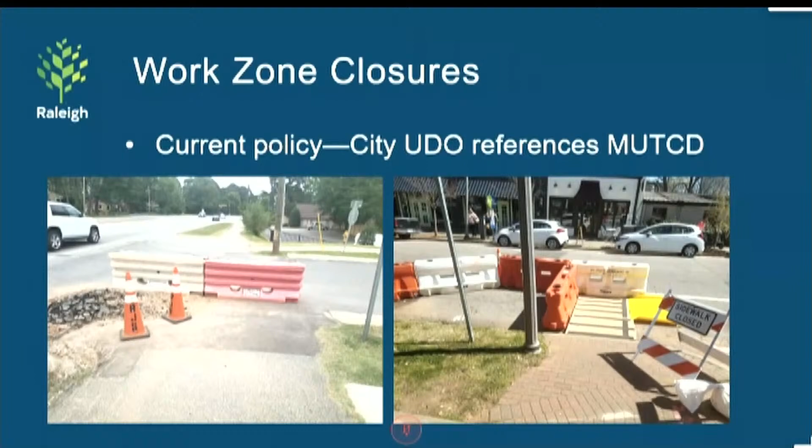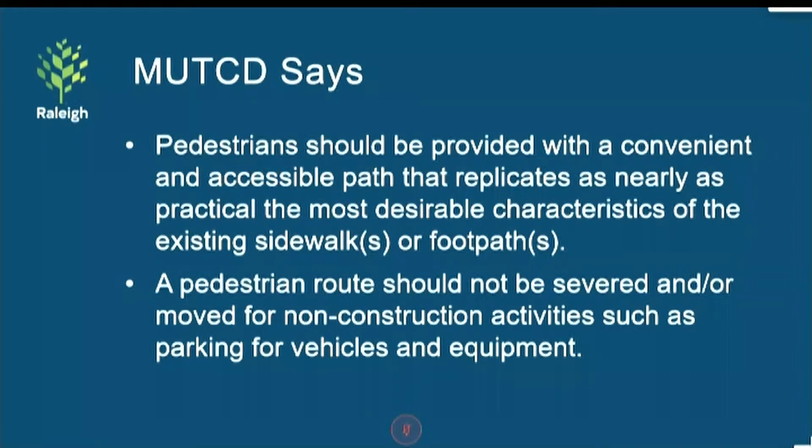So what are we talking about? We're looking for something to give development services staff some hard and fast, bright lines in the sand that they can start a conversation with when working with the development community. So what are some things they should look at? Staff have come up with looking at pedestrian volumes, looking at some surrogate for pedestrian delay. If you've got to cross a 2-lane street with under 10,000 cars a day, that's not terrible. If you've got to cross a busy 4-lane with 20,000 cars a day, that's very different. So what does that mean? And then pedestrian safety - do we have corridors with higher than average pedestrian crashes? We maybe don't want to put pedestrians across that roadway more than we have to.

One of the other things we talked about: do we just want to say there are some corridors where you will leave a pedestrian walkway on both sides? And what would those be? Would they be linked to transit? Would they be linked to the PED volumes? What might that look like? Those were sort of the things in the staff brainstorm that we came up with, but we wanted to come back to the BPAC and let you know this is an issue.

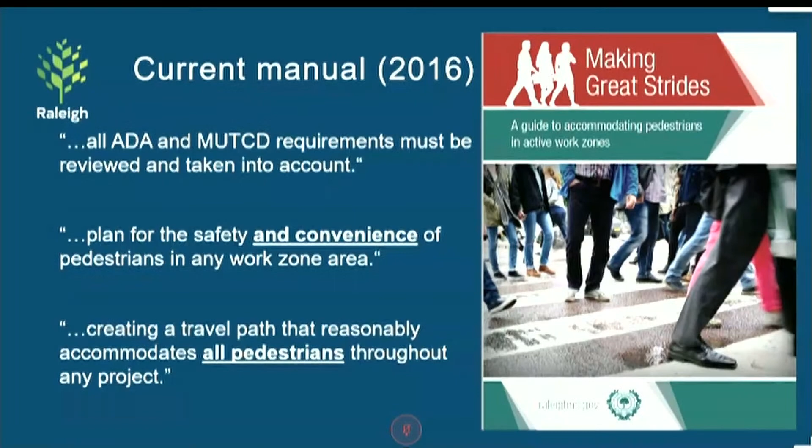We actually have at the city something that goes into a little more detail, which we give to the development community to work out. What we're going to ask is that this go to the pedestrian committee for additional work, looking specifically at these 3 things in our current manual, and by reference, some of the things from the Americans with Disabilities Act and the MUTCD requirements, and looking at ways to codify those. I told you I'd be short and sweet.

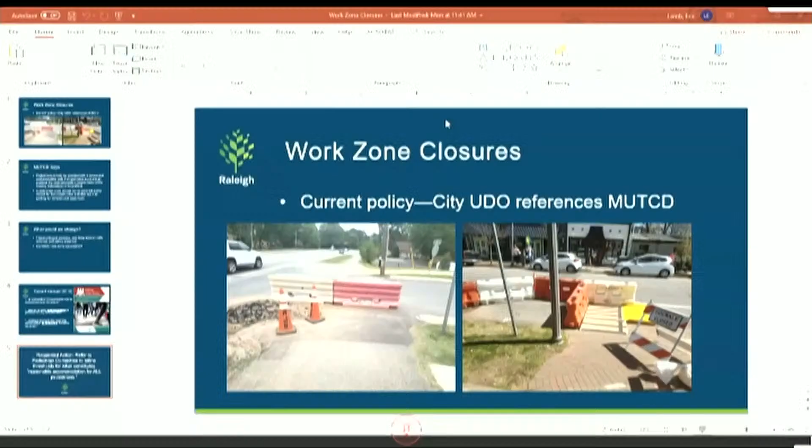That's somewhat less problematic because technically the bikes can still use the travel lane. It's not comfortable, but we haven't severed it completely. But we really don't want to put pedestrians out there in the travel lane for the cars. Agreed. I just wonder if there could be some tweaks we could make, signage, small things we could do to improve that for everybody.

It's at your pleasure, so if you think we need to send part of it to the bike committee, please go ahead. For just minor input, Dwight, would you be receptive to that? I'd prefer to see what the pedestrian committee has to say about it first, honestly. Of course. I'd say 90% of this goes to the pedestrian committee for them to discuss.

I think there are modifications that could or should happen to ensure motorists are aware of the bicycle facility abruptly merging into their lane as well. We haven't had separated facilities before, and when you go to close a separated facility, it's a completely different animal. So we'll start running into this on the bike side eventually, but we've still got a little time.

I experienced a lot on Hillsborough Street, that was my bike and bus corridor, and there was a lot going on, and it wasn't safe, and it wasn't done right. There could be some tweaks. I'd be happy for us to take a look at it, just some minor things.